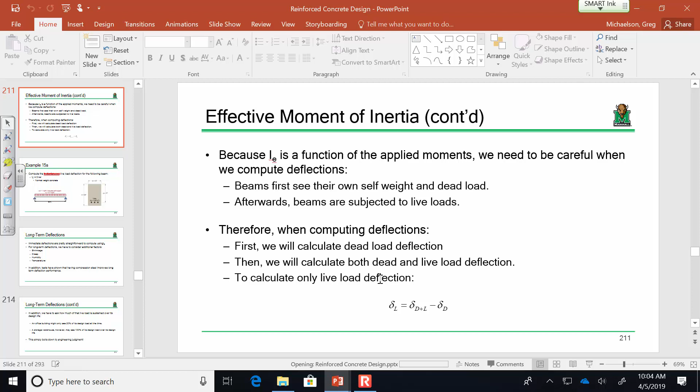We had pretty much done that on the previous example, and we got a live load deflection of about 0.222 inches. We had a dead load deflection of about 0.245 inches, a dead plus live of about 0.467 inches, and the live load deflection was 0.222 inches, obtained by taking dead plus live minus dead.

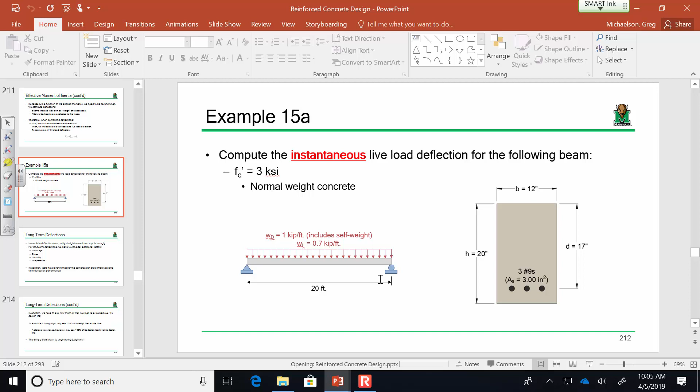That was fine for instantaneous deflections. Then we started the discussion of long-term deflections, and there's a couple of things you need to keep in your head when talking about long-term deflections.

The first thing you need to keep in your head is that the deflections on day 1 and the deflections 10 years from now are not going to be the same. They're not the same because concrete properties are not the same on day 1 as they are 5, 10, 15, 20 years down the road, and there's a few reasons for that, but primarily it's because concrete properties are not static—they do slowly change over time.

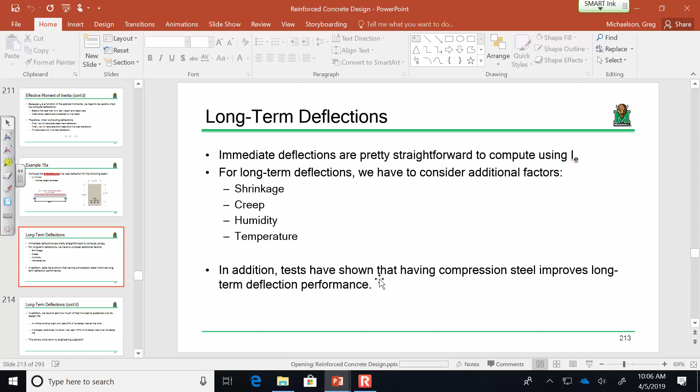So typically your long-term deflections are larger than the deflections you get on day 1. In other words, your long-term deflections are larger than your instantaneous or immediate deflections. That's the first thing you got to keep in your head. The second thing you got to keep in your head...

...is how much of that live load is sustained. I wish there was a good answer—like if this is the structure it's 30%, if that's the structure it's 80%—a straightforward plug-and-chug equation or table that tells you what it is. Unfortunately there's not; it just boils down to judgment. An office building might only see 20% of its design live load all of the time, whereas a library or storage facility might see all of it all of the time.

So what we're ultimately going to be doing today for this next example is we're going to try and determine how much of that live load deflection is sustained. Now, just like with live load deflection, you cannot compute a sustained live load deflection directly. You have to compute dead plus sustained.

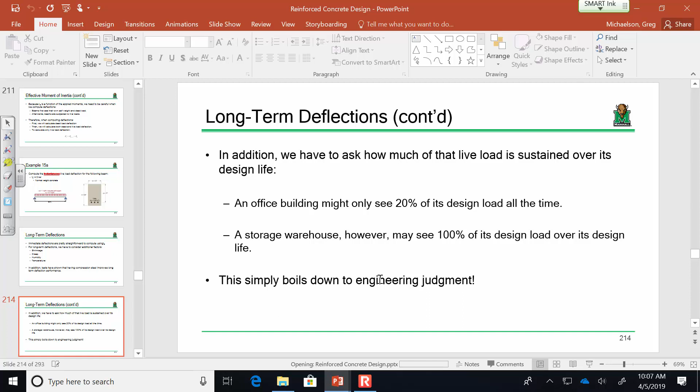So we're going to have two more deflections that we need to compute. This one we're going to compute directly, and this one we're going to compute by taking the difference between the dead plus sustained minus the dead. This one's going to be easy since we already have our dead load deflection. We're going to compute this one directly, and this one we're going to take the difference of.

Now, the reason why we need that is because ultimately what we're going to do is compute a total long-term deflection. So our total long-term deflection is going to be a function of three things. First off, our immediate dead load deflection, but that's been modified by that long-term effect, with the time period essentially infinity because the dead load doesn't go anywhere. It's there all the time, it's permanent. Plus, however much of that live load is sustained, and then we have to adjust that by the duration.

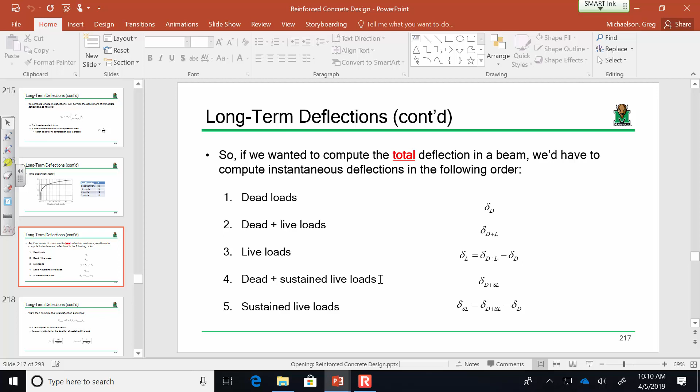Now, if you only have a beam like we have in example 15B, there's no compression steel, right? It's just tensile steel. Then rho prime is just 0, because it's the ratio of how much steel you have to how much concrete you have, and there's no steel, so it's 0, right? Does that make sense? Okay.

So ultimately, when it's all said and done and you're doing deflection calculations, you're ultimately after 2 values. I'm drawing on the board here because there's a couple images and values I want everybody to keep in their head. So ultimately, you're after 2 things: the immediate live load deflection, and the total deflection.

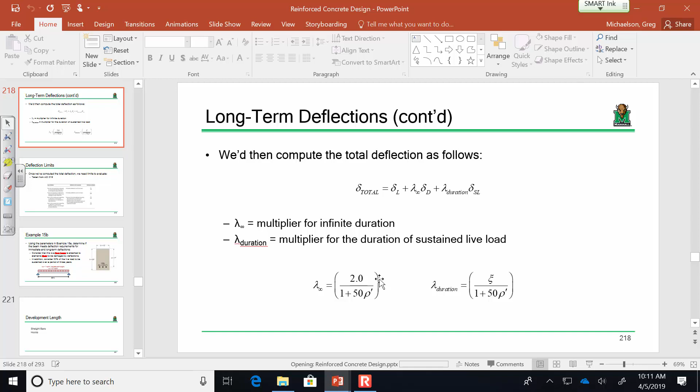Now, why do you care? Who cares about this instantaneous deflection and this total deflection, taking into account long-term effects? Well, first off, just let's take care of the mechanics. We've already done this one, we did that one in example 15A. We're going to do this one in 15B. So don't worry, we'll go through it. But why do you care? Well, here's why you care.

And let me see if I can blow this up a bit on the screen. So this is from ACI 318, and what this is doing is telling us what our deflection limits are. So what do I mean by that? Well, up until now, we haven't really looked at deflection limits, but we have looked at moment limits and shear limits. What do I mean by that?

Let's take a moment. You all know how to compute phi Mn, right? Mn being the flexural capacity of that beam, how much it can hold up before it fails, and phi is our adjustment factor, our safety factor if you will. So phi Mn is sort of an adjusted capacity, whereas Mu is an adjusted demand on that beam.

We're putting dead loads on the beam, we're putting live loads on the beam, and factoring them accordingly. So what I mean by checks: as long as phi Mn is greater than or equal to how much load we're putting on the beam, then we're good. That tells us the beam is safe, and that's the question we ask when looking at moments.

And when we're looking at shears, we have something similar. We have phi Vn, then we compare that against Vu, okay? Well, with deflections, we're doing something different.

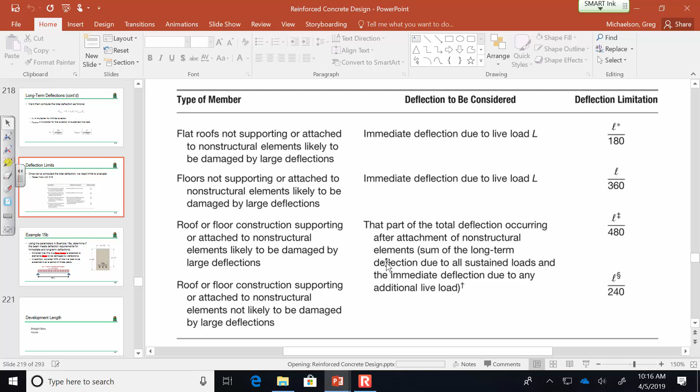Okay, so let's look at example 15B. Just to give you an idea, we're looking at the same beam as example 15A. What we're trying to figure out is...

what's going on with this beam regarding whether it meets long-term and immediate deflection limits. We're going to consider this a floor beam that is likely to be damaged by deflection, meaning it's attached to elements likely to be damaged. Also, we'll consider that 30% of the live load is sustained over a period of 3 years. Everybody okay with that?

Now, there's a few values we've already computed, and I'm going to put them on this board so we don't have to rewrite everything from the last video, since it's exactly the same as before. What was the cracking moment? Does anybody remember that from this beam, since we'd already done that? It was 27.39 foot-kips.

We had a gross moment of inertia—I think that was 8,000. We had a cracked moment of inertia, which was a lot smaller. What was that? 4,067. And we had an E value.

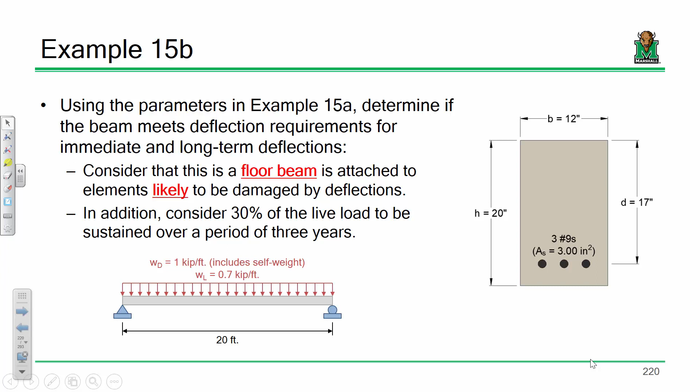What was that? Anybody remember? No? The modulus of elasticity was 3122. Last time we organized this in a big table—you can put this in the table, or do it however you want, it really doesn't matter.

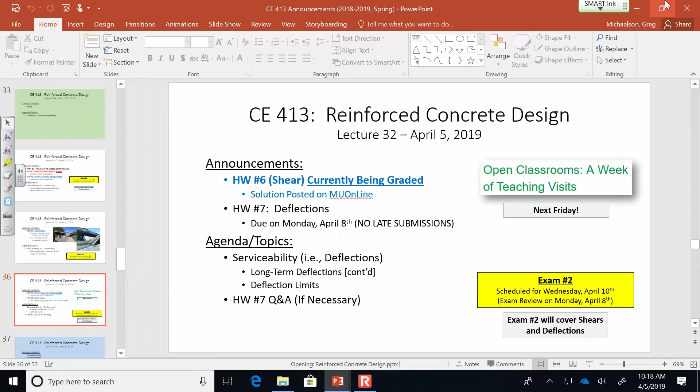Okay, so here's example 15B. First off, we know that the live load deflection was 0.222 inches, and what we're after is the total deflection. So let's see if we can work that out.

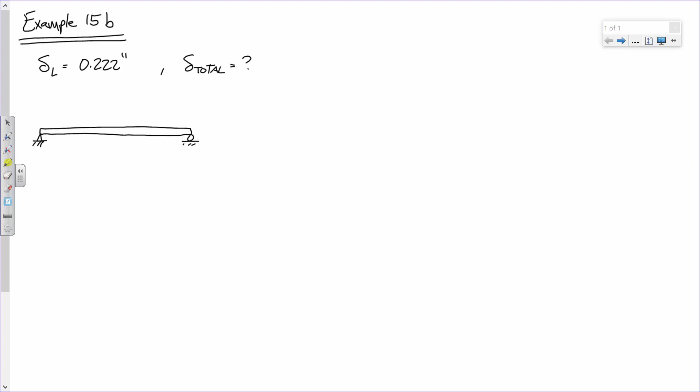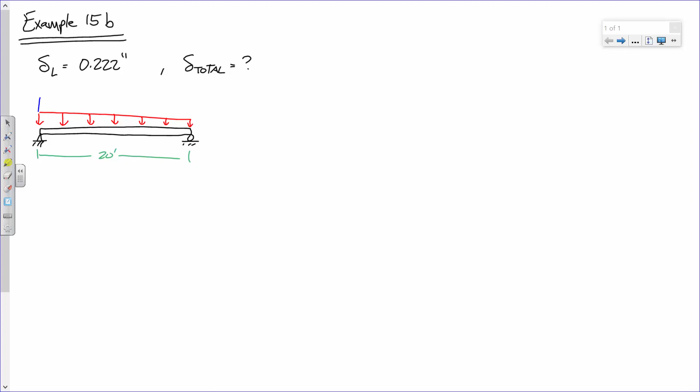So we have a beam. How long is that beam? 20 feet. Now let's look at the loads. The way I'm going to draw this is we've got a load, and then we have a load on top of that. So we're going to handle each of these one at a time.

So the first one is the dead load. How much load was that? 1 kip per foot. And then how much was the live load for this problem? It was 0.7 kips per foot.

But actually right now, I really don't care about the live load because I've already figured out the deflection due to the live load, it's already 0.222. Instead, what I care about is how much of that live load is sustained. I care about the sustained live load. Tell me from this problem how much of that live load is sustained, not the calculation, but how much is sustained?

30%. So what I need is 30% of the live load. That's 0.3 times the live load of 0.7. 3 times 7 is 21, so that's 0.21 kip per foot. Is everybody okay with that?

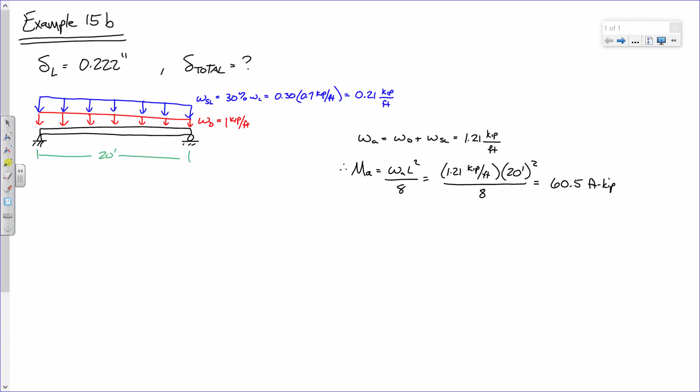IE, right? I compute an effective moment of inertia. Okay, an effective moment of inertia then, remember, it's the cracking moment divided by MA cubed times IG plus 1 minus that fraction cubed, times the cracked moment of inertia. So do I need to fill that in with all that data, or can you all do that?

So we have MA is 60.5. The cracking moment is 27.39. This is 8,000, and that is 4067. Y'all think you can do that? I'll give y'all a second on this one, this is a big one.

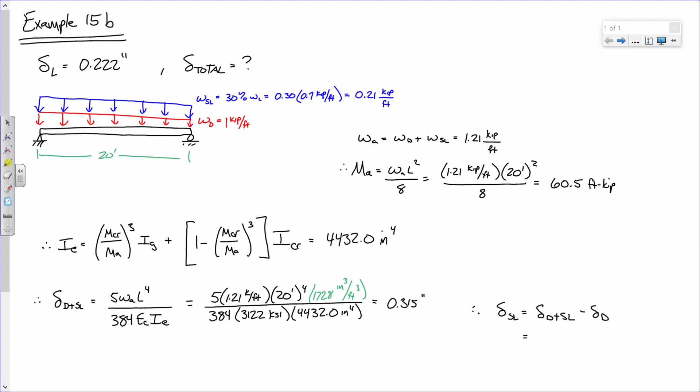0.070 inches. Do I have a second on that? Everybody good? All right. So that means this is 0.070 inches, and this right here is 0.070 inches. So does everybody see how this deflection equation is working out? We have the live load deflection plus the dead load deflection modified by whatever this is, and then we have the sustained live load deflection modified by whatever this is, right? Probably a good idea to start figuring out whatever these are.

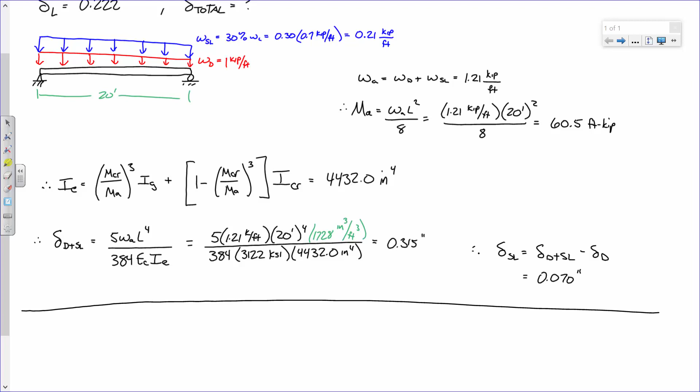Sound good? Now let's go back to the beam, and let's make sure we're clear on something. What is rho prime for this beam? 0. And why? Because there's no compression steel. So if this is 0 and that is 0, what is this? What are these lambda values going to come out to be?

Whatever these are, right? Make sense? So would a fair statement be the following: that this one, what's this one going to be? 2. And this one is going to be whatever that modification factor is, right? Times 0.070 inches. Would you agree with that?

Now this is our time-dependent factor, right? But how are we looking that up? What information do we need from this problem in order to look up this value? 3 years. That's our duration, right? Now how many months are in 3 years? 36 months, right? So let's do this.

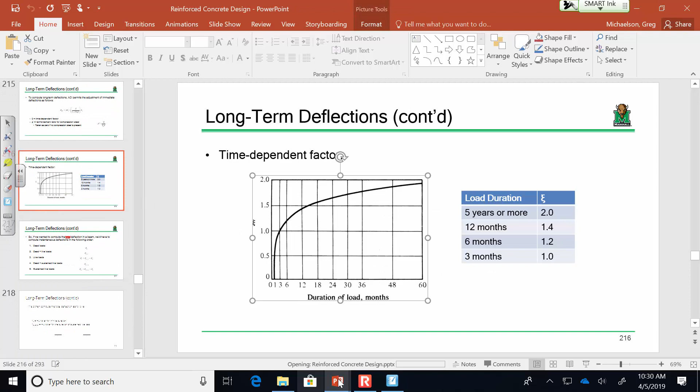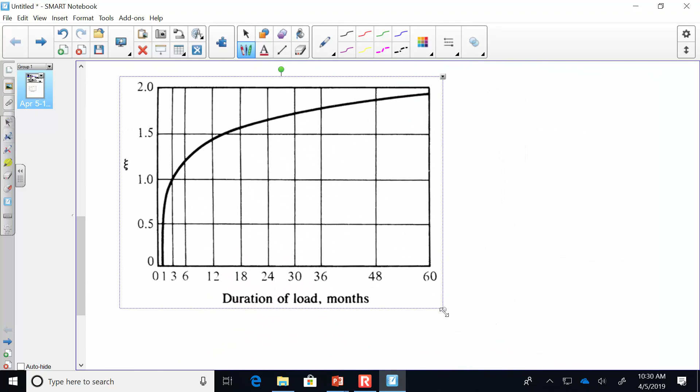Oh, God. I knew that was going to happen. Okay. All right, let's see something. Let's see if I can draw a straight line here. Actually, let's do that. Let's do that.

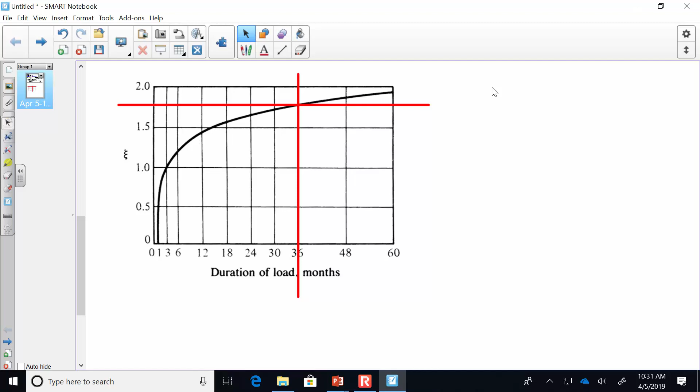Okay, so we said 36 months? So 36 months, that's about right there, right? And so what we're trying to look for is that value right there. That'd be a fair statement? Now, typically what we do when looking at time-dependent factors is we look up and round to the nearest tenth. So what do you think, 1.7 or 1.8? I'm thinking 1.8.

So let's take this. Let's take that as 1.8. So therefore, since rho prime is 0, lambda for infinity is 2, and lambda for 3 years is 1.8.

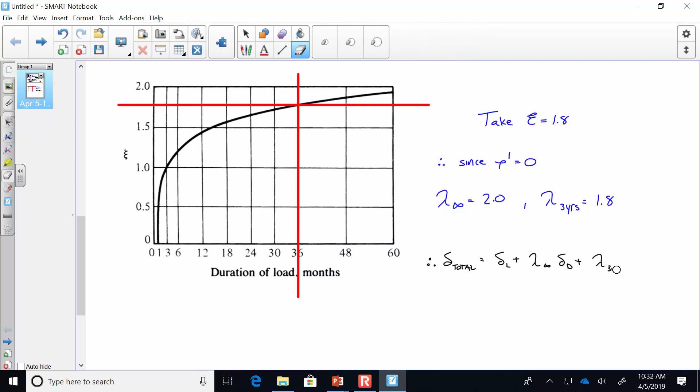So therefore, delta total is delta L plus an infinite duration for our dead loads plus a 3-year duration - I don't want to say 3R, it's 3 years - for our sustained live loads. So 0.222 plus 2 times 0.245 plus 1.8 times 0.070. And so what does that come out to be?

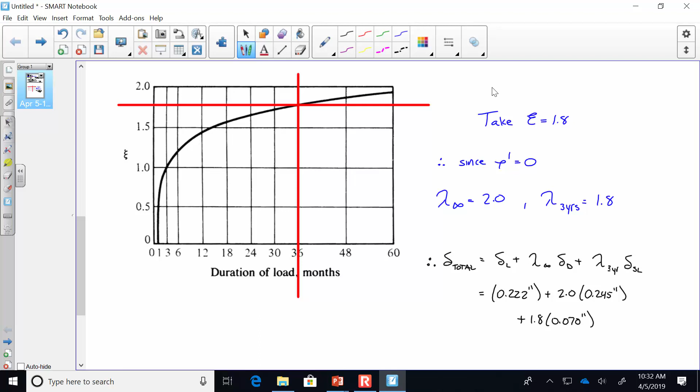Say it again. 0.838 inches. Do I have a second on that? So that's not too bad, right? That's a pretty simple calculation.

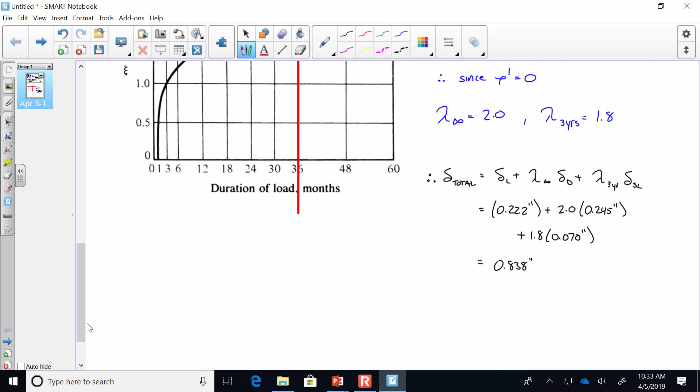So ultimately, when you're doing a deflection problem, you're after two things: the live load deflection, which is 222 in this case, and this, which is 838. Now those values by themselves really don't mean much because that's a deflection - I don't know whether or not that's an acceptable deflection. So let's check out each one independently. Now, in order to do that, I'm going to screen capture. Where's my snipping tool?

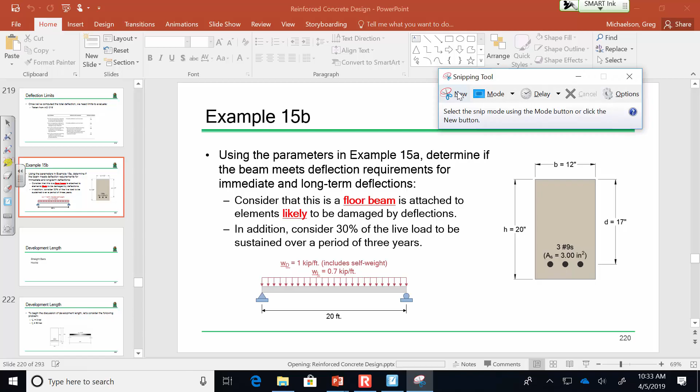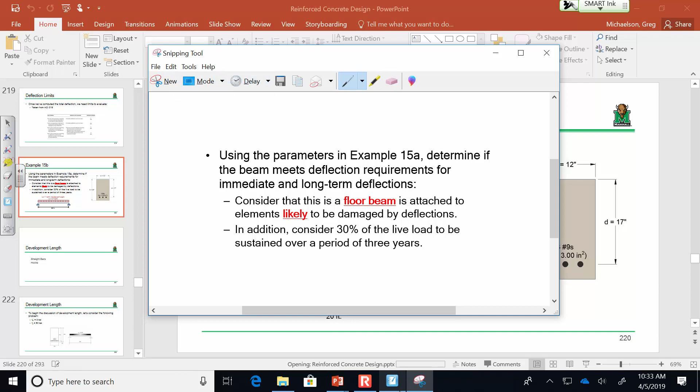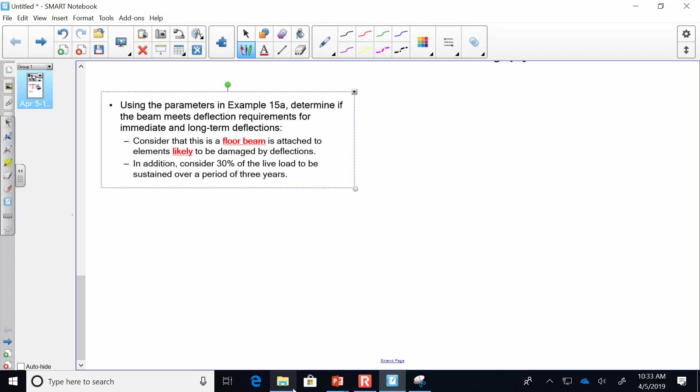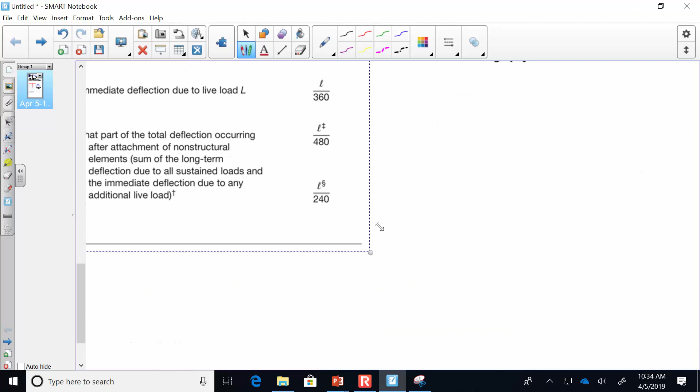This statement right here. Actually, let me just do the whole thing. And let's snip this, that way we're looking at the same thing and I don't have to keep going back and forth between slides. Okay, so we have two referencing the immediate deflection and two referencing the long term. So let's take the immediate.

Which one are we going to be dealing with, the first one or the second one? What's the difference between the first and the second one? The first deals with flat roof elements, and the second deals with floor elements. Which one matters to us? It's a floor beam, right? So what we're basically saying is this, okay?

Our live load deflection is 0.222 inches. What this table says is that our maximum live load deflection is L over 360. So that's 20 feet divided by 360. Does anybody have a problem with that calculation? We need to convert that to inches so we're comparing apples to apples, so we need to multiply this by 12. And so what does this come out to be? 0.67. Do I have a second on that?

What does this mean? We're good, right? This beam responds appropriately under immediate live load deflections.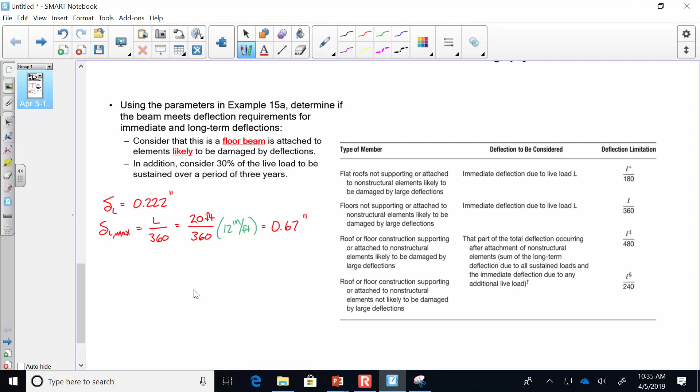Now let's look at total long-term deflections. So our total deflection is 0.838 inches. What is the maximum deflection? Is it L over 480 or is it L over 240?

480. Why 480? Likely to be damaged - this floor beam is connected to elements likely to be damaged by long-term deflection. So this is L over 480, that's 20 feet over 480 times 12 inches per foot. And what does that come out to be?

Given the complexity of this problem, how would you fix it? I'm asking you. Make the beam shorter - that is an option. Why would making the beam shorter help? It decreases your maximum moment, but it also decreases your maximum deflection. Remember, moment is a function of L squared, but deflection is a function of L to the 4th. So even if you decrease your length by a foot or two, that might make a big difference. So that is one option.

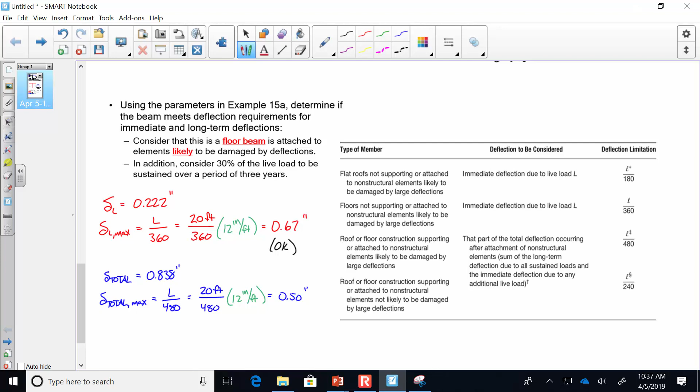What's another option? Hold on, what'd you say? Put in some compression steel. There you go. If you put in some compression steel, you'd have a solution that works. So here's a couple options, we can write this down: decrease L, add compression steel.

What else? There's other options besides that. And what value do you think would affect it the most? It's a rectangular beam, so you're either going to make it wider or deeper. What do you think is going to affect it the most? The depth, so deepen the beam. There is actually another option that has to do with the beam that we're not talking about. It actually does have an effect here more than it has with strength.

Why would changing the FC prime help? What does FC prime affect in all of these calculations? Give you a clue, it's in the box. Actually, there's two things it affects: cracking moment, and it affects E, right? Remember, E is 57,000 times the square root of FC prime. You bump up your FC prime, you're bumping up your E. You bump up your E, your deflections are going to go down. There's a few options here, and this is a problem you could very realistically face. So, larger FC prime.

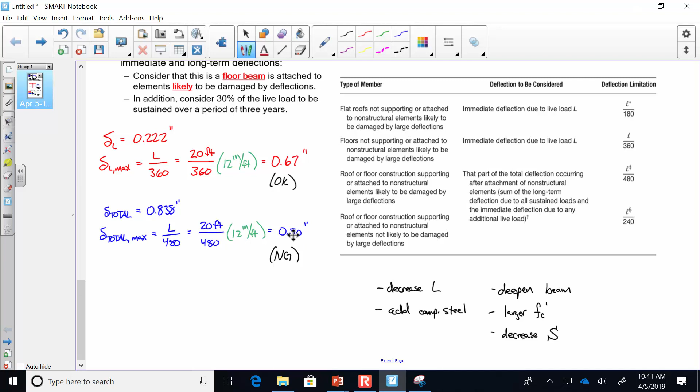Everybody good? Now, I do have one other thing I want to talk about, and this has really nothing to do with this example, but it has something to do with your homework. I want to pass this out, and you'll see what I mean here in a second. On your homework, one of the problems is doubly reinforced, but there's one thing we haven't talked about in here - it's really not very difficult, but instead of spending 50 minutes on an example that only has one big point, I decided let's just do this one via handout to make it a little faster.

Okay, where did my marker go? I had a marker. Ah, there we go.

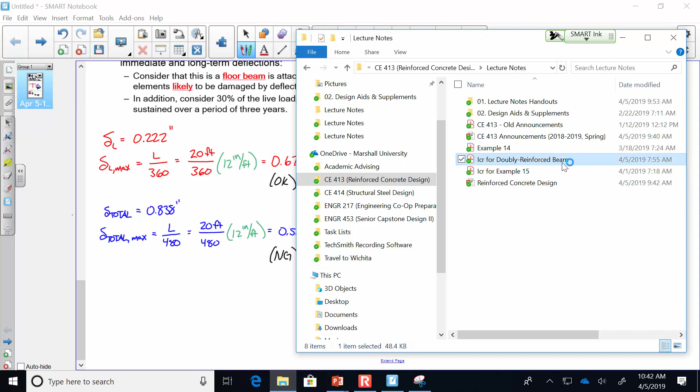Okay, let me show you something, and I think this will make sense. First off, I just picked a random example, I just made some random stuff up.

On the second problem on the homework, you're required to compute the cracked moment of inertia for a doubly reinforced beam. We've never done that before, okay? It's really not any different from what we've done before. There's just one little catch, okay?

So if I have a singly reinforced beam, like this, what I do is convert that to a beam that's like that. Then I have that lump of concrete down below. Now, what is the area of that box right there? How wide is it? It's B wide and X tall. So the area is BX. Would you agree with that?

Now let's say you have a beam that's doubly reinforced. So you've got this going on, right? Same deal, we're going to handle it one part at a time. Here's your neutral axis. Down below, that's everything in tension. All you're going to have is a lump of concrete that's NAS. So this is AS, this is AS prime.

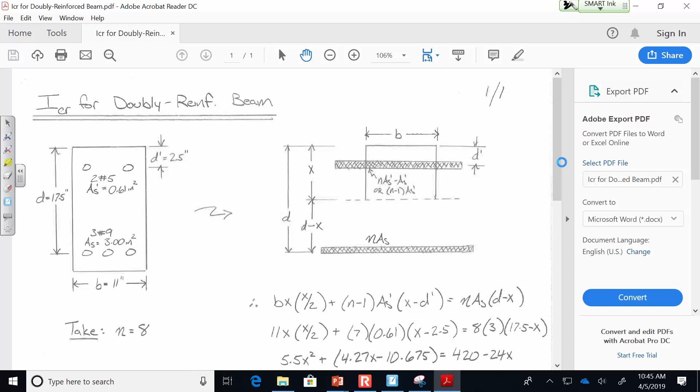And then on top of that, we have that steel turned into an equivalent lump of concrete that's N times AS prime. So the way I propose you do this, it doesn't matter what order, but I'm saying the total area of this box is B times X, but the area of this little rectangle is not NAS prime, it's NAS prime minus AS prime. Because if I don't do that, I'm double counting that area right there. Does that make sense? Everybody okay with that?

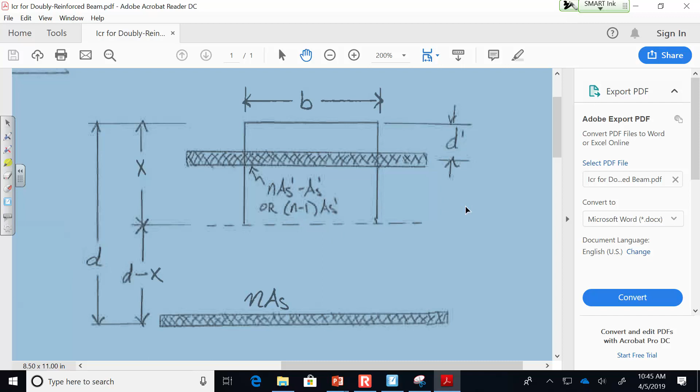So if you've accounted for that, the process is exactly the same. When I sum moments about this axis, what do I have up top? I've got BX times that moment arm of X over 2. Now this one's new: I have the area of this block, so n minus 1 times AS prime times the moment arm. How far is it from this dashed line to that block? Well, it's X minus D prime. And that's got to equal this chunk times that moment arm d minus x.

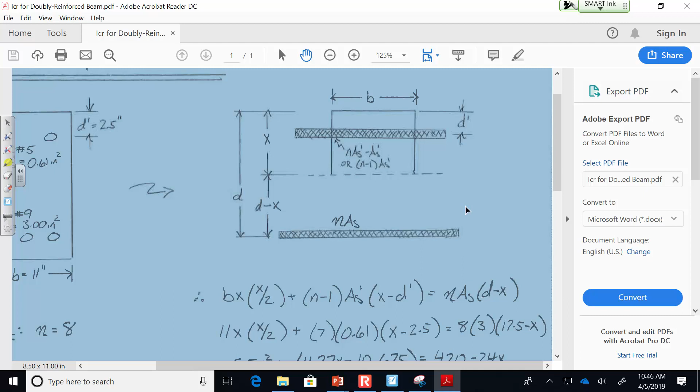Once you've got that, just plug and chug your values. It's a quadratic equation just like any other. There's your x values, only take the positive one, and it's I plus AD squared. The only thing is you have 3 rows now: the concrete, the tensile steel, and a new row for the compression steel. Plug and chug, and you get like 3977. It's really no different from what you did for a singly reinforced beam. The only difference is that n minus 1.

So I wanted to explain why. Does that make sense? Right here, the area of the concrete is not B times X. The area of the concrete is BX minus those holes right there. If I didn't have this, I would have BX and then a rectangle that's NAS prime, and I would be double counting that area. Do you see what I mean? Does everybody else see that?

I get the feeling you don't see it. Okay, can I erase this? All right, let's do it again.

Do you agree that here's the box, and so the total area of that box is BX minus AS prime? Do you agree that the steel is going to have an area like that? Would you agree with that? Now add all that up. What do you get? The sum is BX plus NAS prime minus AS prime.